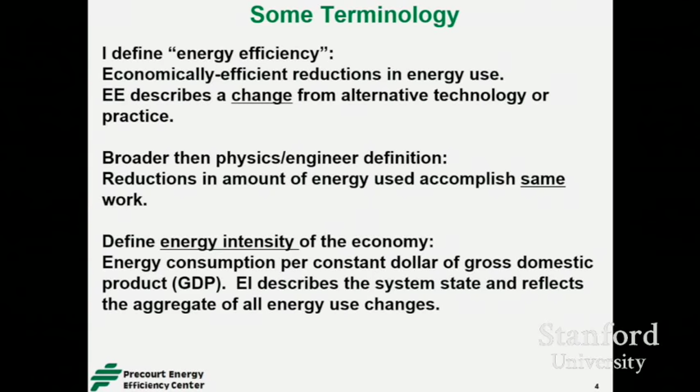And then I'll talk about the energy intensity of the economy—energy consumption per constant dollar of gross domestic product. Notice energy intensity is described as a system state. The accumulation of all the energy efficiency changes will change this aggregate statistic, the system state. So it's important to remember one is a change and the other is a state. I'm talking about this broader definition.

So why energy efficiency? Well, if you think of all the energy policy debates in the United States, there are about 3 systems: the economy, the environment, and national security. I call this the energy policy triangle. I think most of the debates have been about trade-offs among these issues.

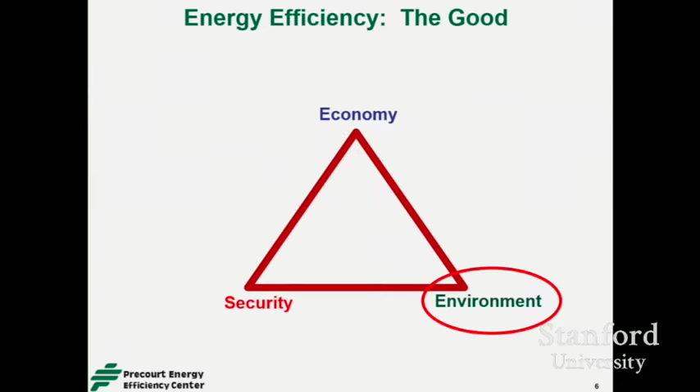So within that, what's good about energy efficiency? Well, for the environment, the cleanest energy is the energy you don't have to use in the first place—good for the environment. For security, if you use a lot less energy and reduce the amount of energy we have to import from insecure places, it's good for national security. And for the economy, if these are cost-effective—benefits exceed the cost—that it's good for the economy.

But what's the bad about energy efficiency? Well, the bad—something I used to talk a lot about, last seminar I gave here—was about this: it's all the things we're not doing. Options that have not been fully utilized, the unpicked fruit, the fruit rotting on the tree. And there really are some real behavioral, structural and market failures that have stopped us from getting the ideal amount of energy efficiency. A lot of my colleagues in the audience here are working on how to overcome those barriers.

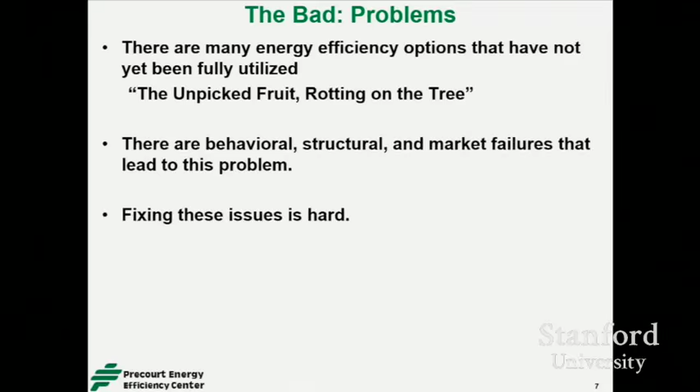Fixing those barriers is hard. Here's a whole bunch of market failures, institutional barriers, and behavioral issues that collectively there's been a tremendous amount of research showing that we could get more energy efficiency and it would still be economically attractive if we could get past those barriers.

But what I want to talk about is the reality that real energy efficiency is really all around us. We just have to look around and see what's happened. Some of them are new and improved technologies. Let me give an example.

The light bulb: compact fluorescent light uses 13 watts, replacing an incandescent that used 60 watts. So this uses about 22% as much electricity to give the light, but it's not ideal light. Now we have LEDs that take about 11 watts to get about the same amount of lighting, and this is just as good quality light as you can get from an incandescent.

Another new technology that's been perfected is motion sensing, light sensing switches. So you may at home tell your kids to turn off the lights. When you leave the office, you don't have to do that yourself because they'll turn themselves off for you.

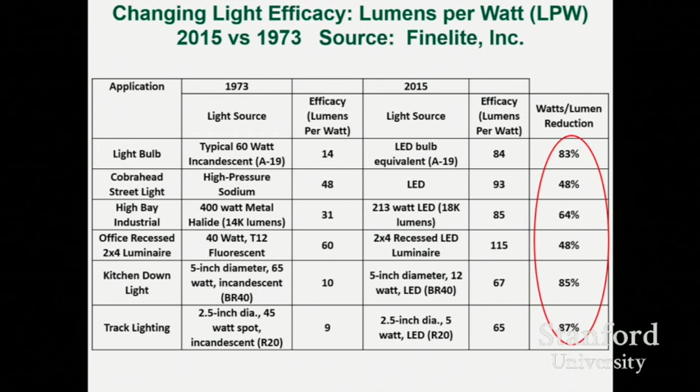Just new technology. So what's the bottom line of these? If you look at 1973, using that date because it was the oil crisis, the oil embargo, and compare light sources then to what we see now for light bulbs, street lights, industrial, offices, kitchen, track lighting—the reduction in watts per lumen for lighting ranges from 48% to 87% to get the same quality of lighting. So at the micro level, lighting, we use a lot less energy in order to create light.

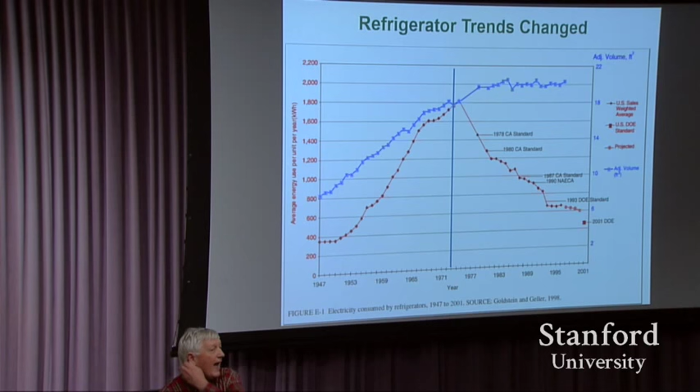Refrigerators. Many of you have seen the graph that starts in '73. I like the graph that starts in 1947 because this is the amount of electricity used per refrigerator of things sold in different years, going up to 1973. As the blue line shows refrigerators getting larger, the red line is the amount of electricity per year used in those refrigerators—it was going upward until the time of the energy crisis in '73. Then there were technological advances funded by the federal government at Oak Ridge National Laboratories and Lawrence Berkeley Labs that changed the compressor systems, changed the insulation systems, and now this is what's happening to energy per refrigerator, while the size is continuing to go up.

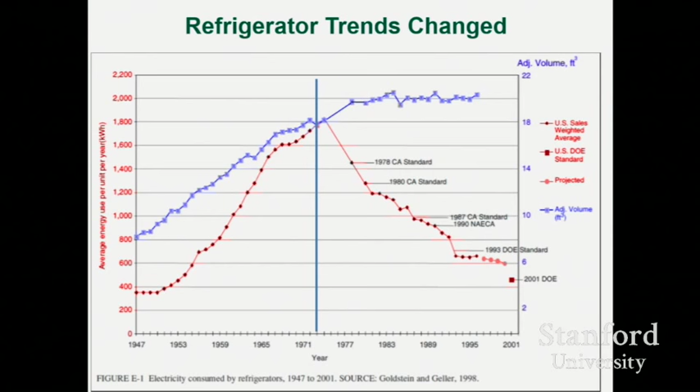So we're getting refrigeration using a lot less energy as a result of—this shows different standards coming in. But those standards came in because new technology was invented and integrated into refrigerators, and manufacturers then figured out how to use that technology for more efficient refrigerators, and then the standards kept pushing it faster and faster downward. So refrigeration. Now, cars and trucks.

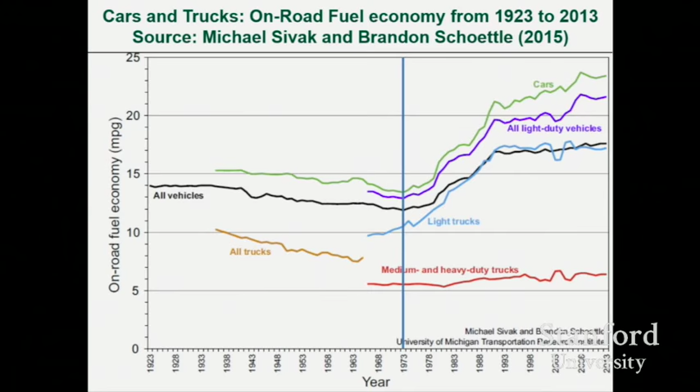Before 1973—this goes down to 1923—the miles per gallon average of all vehicles on the road was going down. Cars was going down, all trucks was going down. Light trucks, the most recent data, was sort of going up. Then we had the energy crisis. Gasoline prices went up. We passed the corporate average fuel economy standards, which I'll call the CAFE standards, and that downward trend turned sharply upward.

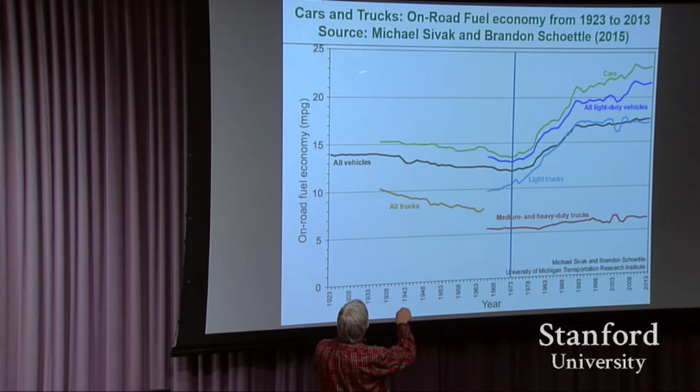So all cars now on the road as of 2013 got about 23 miles per gallon, as opposed to 12.5 miles per gallon in 1973. If you take the inverse of that, fuel use per 100 miles, in 1973 to drive 100 miles we used 8 gallons. Now for the new cars, we use 4 gallons to drive that same 100 miles. Energy efficiency—we're getting the same quality of service using less energy.

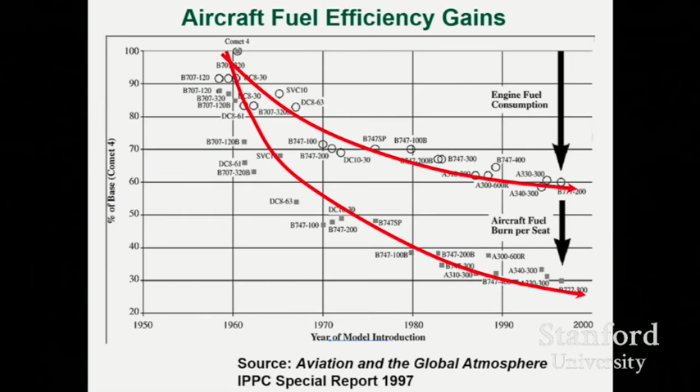Aircraft fuel efficiency—this is an index going back to 1960. If you look at engine fuel consumption, standardized thrust of the engine is down now to about 60% of what it was in 1960. Aircraft fuel burn per seat mile is about 28% of what it was. Those are basically technological changes.

For example, winglets—that increases the efficiency when it's cruising. The Dreamliner has modified the equivalent of winglets with that turned-up tip. This is composites, a composite body. It's designed to use 20% less fuel than the more recent planes it's replacing.

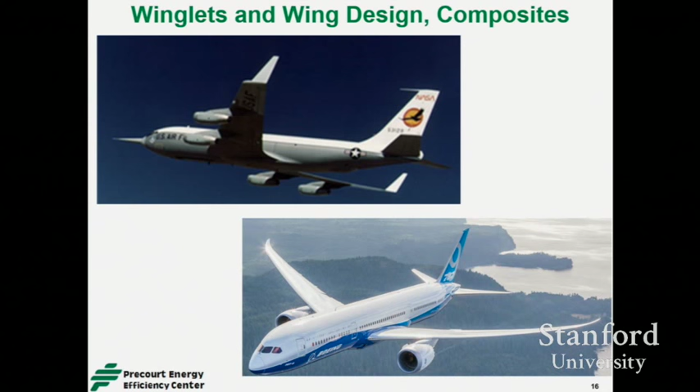So again, why is it that they're doing this? According to my son-in-law, who is high up in Boeing, it's because the airlines have been pushing them to have the next generation of planes even more fuel efficient. Something like a third or more of the cost of running an airline is jet fuel.

And with that, there's a big, strong market force for the airlines to push Boeing and Airbus to have more fuel-efficient airplanes.

So those are new technologies, improved technologies. Now that we had changed insulation, that's implementation of existing technologies. We didn't have to create anything new.

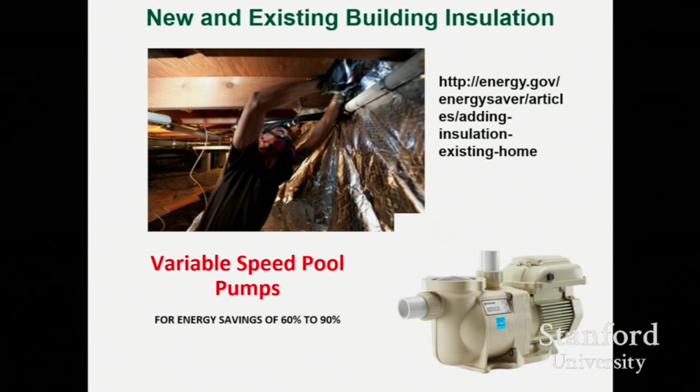New building insulation, both new buildings and retrofit of existing buildings, but even pool pumps. You can reduce your energy use by 60 to 90% with variable speed pool pumps.

You must be saying, boy, what a bunch of trivial things. They're all insignificant. And if you're saying that, you got the point. Because what energy efficiency has been is accumulation of a lot of things, each in themselves, which looks insignificant.

I'm going to give you some aggregate statistics that show how a lot of insignificant little things add up to a massive thing. So other building technologies: insulation around your water heater, weather stripping, programmable thermostats.

What I thought was cute was that early programmable thermostats, you know, you can have it go down at night and stay up when you're warmer in the day, when if you're heating or cooling, it's hot in the middle of the day when nobody's around.

Well, only something like 20% of them were programmed. 80% of them might as well have been a dumb thermostat.

And so anybody who remembers the VCRs that always flash 12:12:12, same concept.

So what's the simple solution? Well, they're sold pre-programmed now. You buy a thermostat, it's an Energy Star pattern that's pre-programmed.

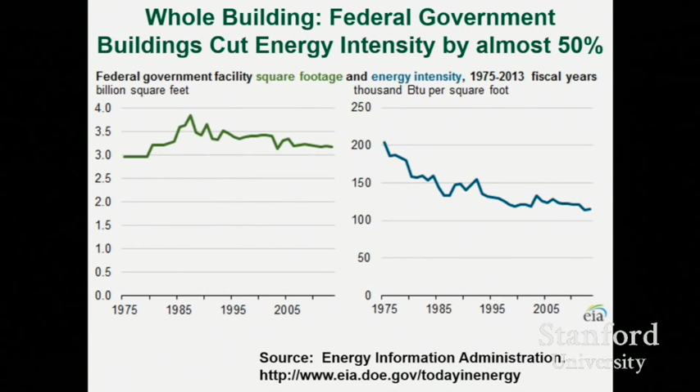In '75, it was 200,000 BTUs per square foot. Now it's 120,000, down 40%. That's whole buildings operated by the federal government.

The Stanford heating cooling system - it's not an energy system, it doesn't supply any energy. It's just an energy efficient conversion system that moved us from the steam system to the hot water system.

It uses hot water and cold water that is heated or cooled by electricity, which we buy from off campus. But this can reduce the carbon emissions and energy use by the whole system.

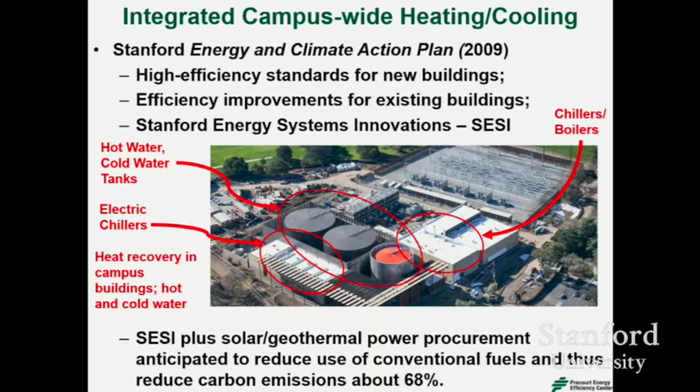Let me jump in. We have changed practices. This is a long quote, but this is from DuPont Titanium Technologies, one of the DuPont companies. The headline is that they saved $100 million from energy efficiency. That's really what their headline was.

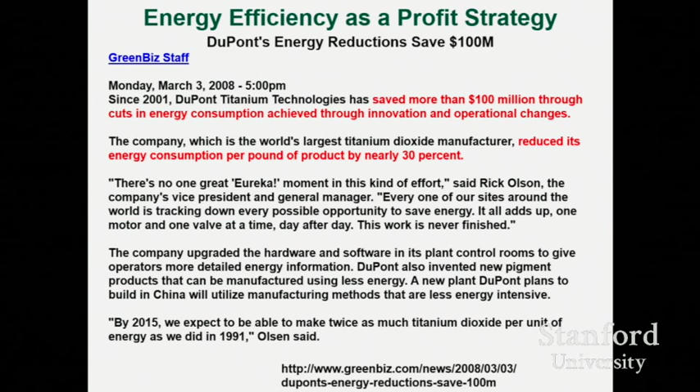They saved a lot of money. I love what their general manager said: no great eureka moment. They're tracking down every possible opportunity - it adds up one motor, one valve at a time, day after day.

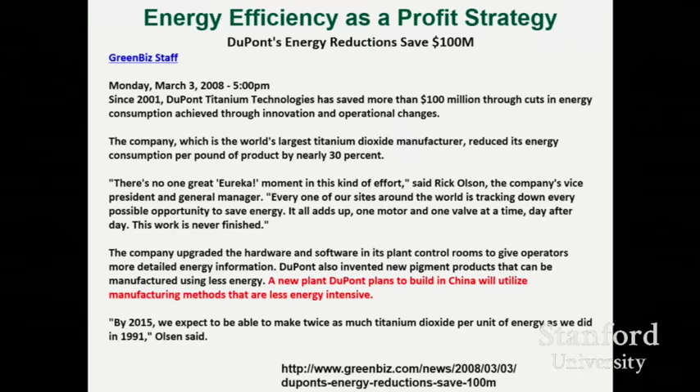Hardware and software and control rooms give operators more detailed energy information. New pigment products, new plants that are more energy efficient. Lots of little things cumulatively saved them $100 million.

Motivation for energy efficiency - this is within Microsoft. This is a dashboard that they use to track the building performance index of every one of their facilities internally.

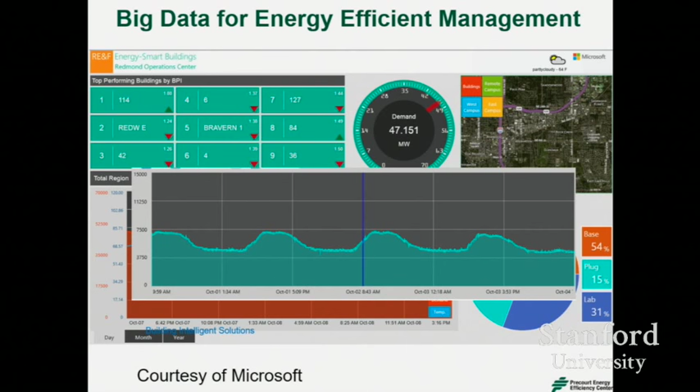You can track it on different time scales and find out where you have energy use problems by benchmarking one facility after another. So Microsoft and many other companies use big data to find ways of saving money through energy efficiency.

Airlines - I told you about the technology. Well, the technology has led to reductions in BTUs per seat mile, for both international and domestic, and this is the change in BTUs per seat mile since 1960.

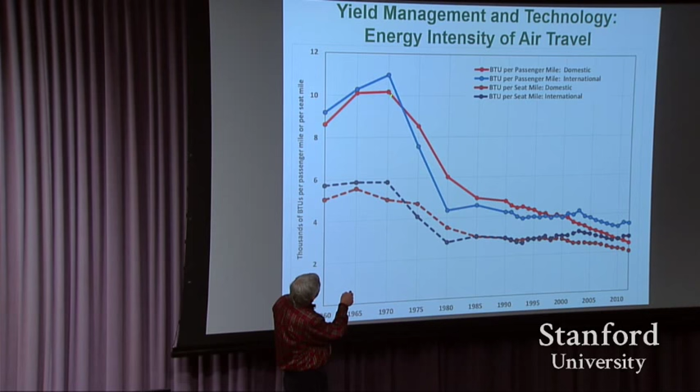And if you just compare with 1970 before the crisis, the BTUs per seat mile is cut in half, but the BTUs per passenger mile is down much more sharply. And why is that? Because the load factor has gone up much more.

Airlines have learned to use software, incentives, and yield management to crowd us into planes - not smaller seats, because that influences BTU per seat mile, but the difference between that and passenger miles.

That difference is a profit motive, a private sector profit motive that the airlines have led to. If you look at thousands of BTUs per passenger mile, this is 10 or 11, and that's 2.5 or 3.5.

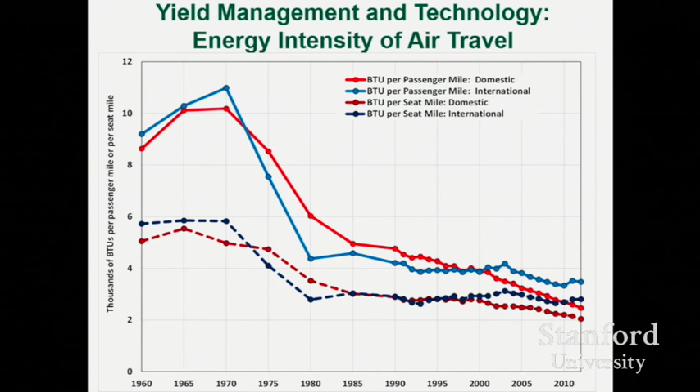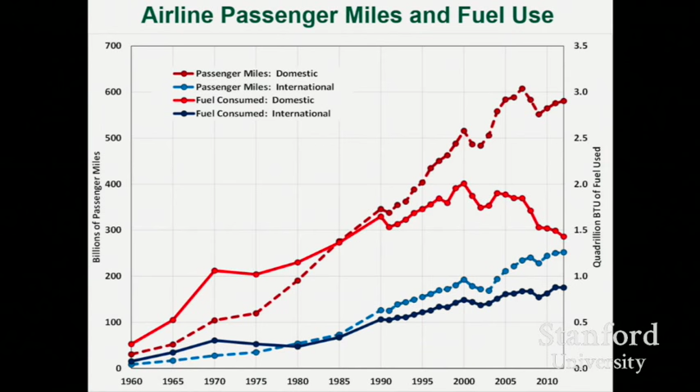Tremendous energy efficiency in air travel. So that's why our domestic air travel can continue to grow while the actual amount of fuel that we use is declining in the aircraft industry.

Another practice is that some commercial buildings are being retrofit. This is the Empire State Building, and this is their internal analysis of all the actions they took to reduce energy use. Notice these small percentages - 2%, 3%, 5%, 9% - from all the various things they did, leading to a 38% reduction in electricity use from the retrofit.

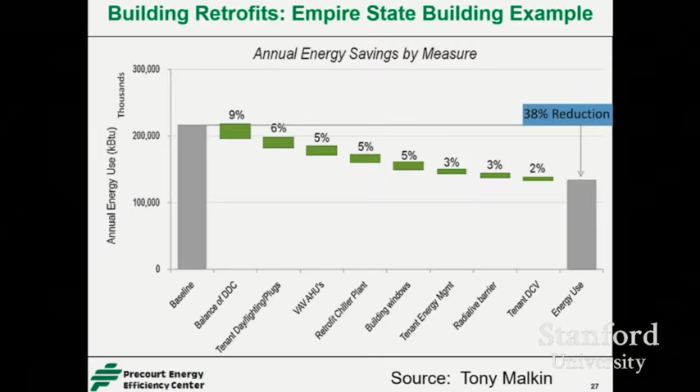Did they do that because of regulations? Well, actually they got some energy efficiency rebates from the utility, but they share their spreadsheets. This was profitable for them without any rebates. They took the rebates, of course, because it was gravy, but it resulted in a 38% reduction basically in the commercial building.

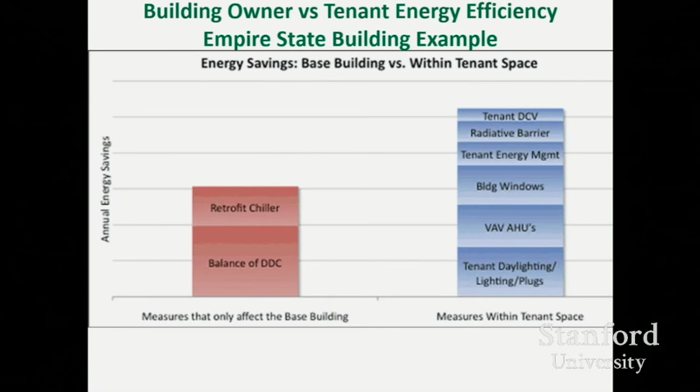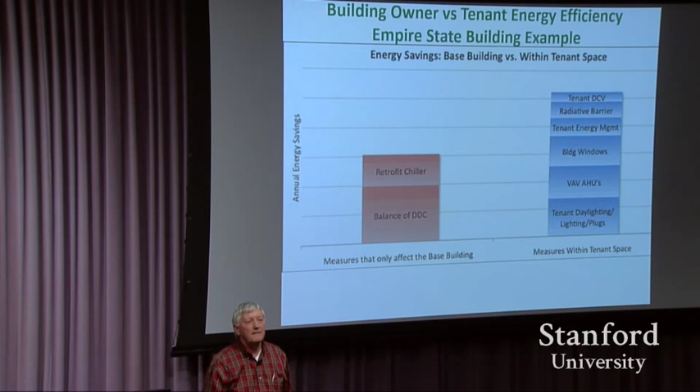What's interesting is if you look at how much of that is in the tenant space versus the building. These are the actions that influence the base building, and these are the things in the tenant space - their own tenant energy management, windows, the daylighting. So in the retrofit practice, more is happening in the tenant space than in the base building.

So what they've done is create brand new contract forms between the Empire State Building, the real estate trust, and the tenants in order to deal with the split incentive problems that you have in buildings. So they have performance contracts, which have been used to manage this within tenant space.

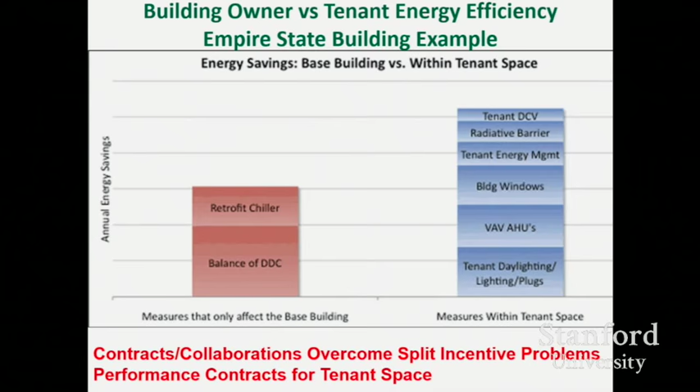This is what Tony Malkin, or the real estate trust, invested in. This is what they co-invested in with the building tenants. Energy efficiency then was not just about the technologies, but legal structures were changing, and contractual structures to motivate changes.

You can't read most of these, but this is internal carbon prices - the list of North American companies who've imposed internal carbon prices in their operations to motivate their managers to do things to reduce carbon dioxide emissions. But most of those emissions were from energy use, so it therefore motivated reductions in energy use.

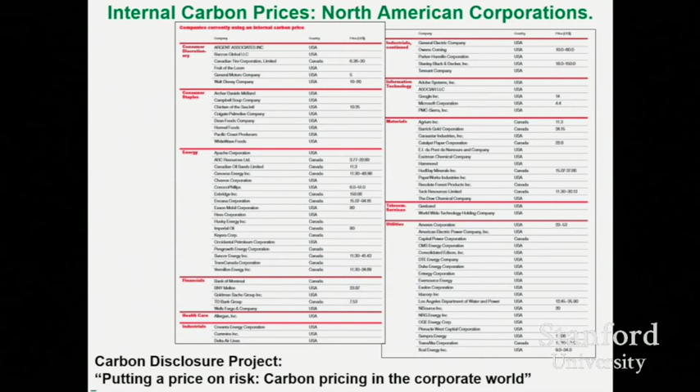So those are examples. Many more examples, but we only have so much time in the seminar. Let's look at the aggregates.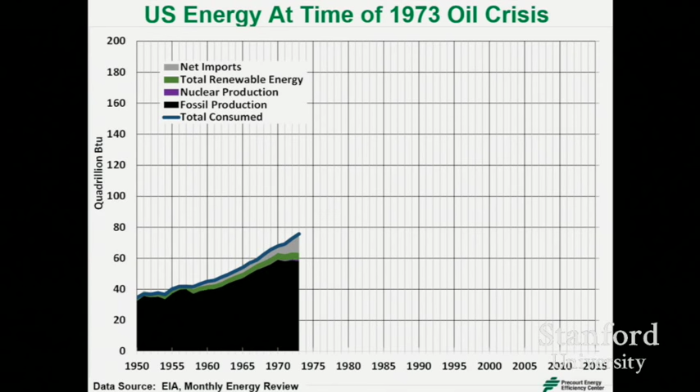Notice that imports by 1973, at the time of the embargo, had just tripled from the year before. We were looking at it just going up and up and up, and now we've seen an oil embargo where the Arab OPEC countries embargoed the United States, Netherlands, UK, and a few others from oil. Oil prices tripled at that time. It was a shot across the bow, and that changed everything.

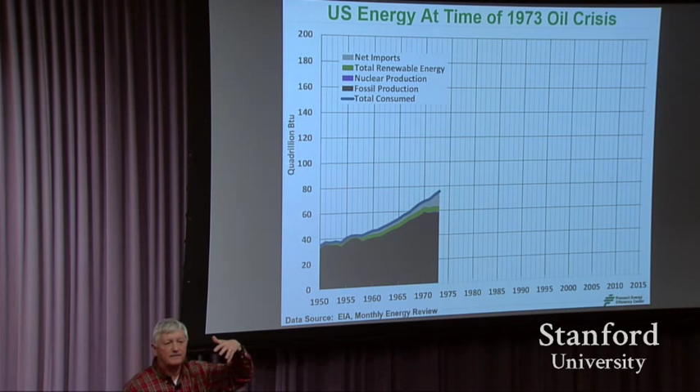But notice this blue energy use - it was growing right along in lockstep with the economy, minus about 0.5% a year. That means the ratio of energy per GDP was declining about 0.5% a year. And so energy use was going up with the economy.

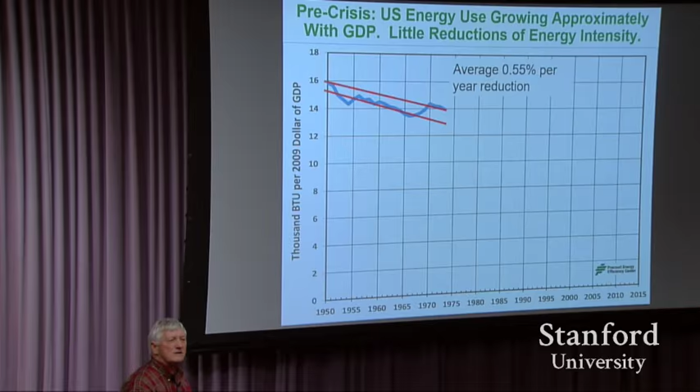So if you look at energy per unit of GDP, I could draw lines from the beginning to the end, following most of this from 1950 through 1973. It averages about, call it 0.5% a year reduction in energy per unit of the economy. That means energy use was growing that much less rapidly than the economy.

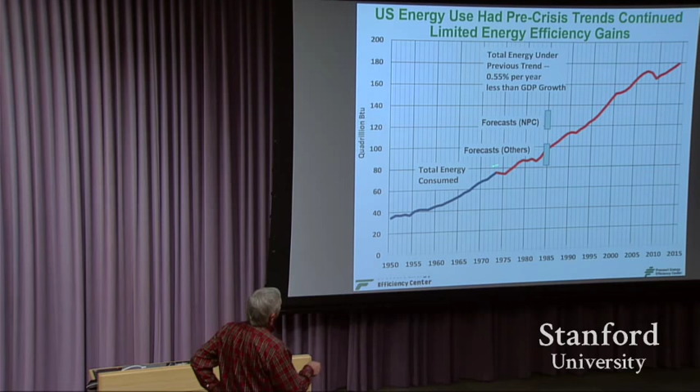So what would have happened if we followed that same trend? This is the actual growth of the economy, minus 0.5% a year. This was what I'm calling the benchmark of what we would have had with only limited energy efficiency, no more than we had before this shot across the bow - that's 180 quads of energy that it would have grown up to. The forecasts at that time were around here and there, so this was consistent with what everybody was forecasting who was doing the analysis.

We created government agencies. The Federal Energy Administration was created, and the Project Independence Report—remember President Nixon's Project Independence—completed by President Ford. It said, look, there are several things you can do: accelerate supply with more domestic production, what they call the conservation strategy, what we'd now call an energy efficiency strategy, and emergency planning. I like this—they said any program would surely be a mixed strategy, taking elements from all of the above. That first came from the Ford administration.

But it wasn't just what the government did. The private sector now faced high energy prices. They also faced the reality that energy was an issue, so they started thinking about it—it was at the front of their minds now. So it became an important factor of innovation. You saw things like DuPont's titanium technologies. The patterns of innovation changed; energy efficiency became an important criteria, like innovating for winglets in airplanes. Capital investment changed because there was a profit payoff for reducing energy use. Even management changed—you'd hire energy efficiency coordinators charged with finding ways of reducing the use of energy.

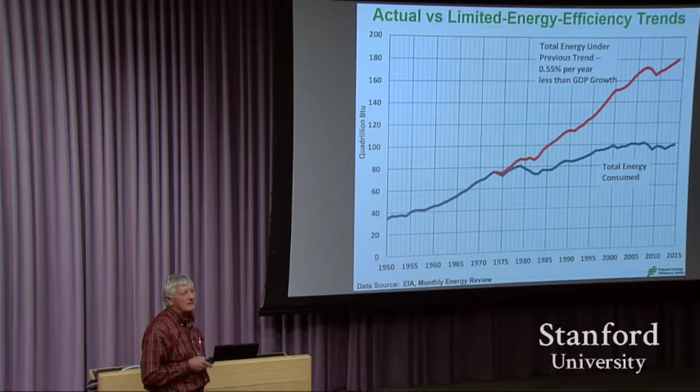So here's what the actual energy use has been in the United States, and you can compare it to what it would have been without energy efficiency. That difference is about 80 quadrillion BTUs, 80 quads, from 180 to a current 100. That is all of those little things I was telling you about, all of which on themselves didn't look very important, but cumulatively just kept growing bit by bit. Some of you are parents, and you know having children—they don't seem to grow from week to week or month to month, and all of a sudden they're asking you for college tuition, and you say, boy, they've grown. That's essentially what's been happening—it's been a slow, cumulative process.

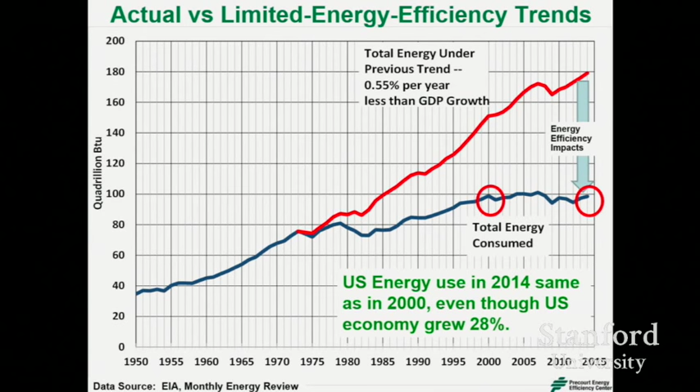Notice that since 2000, we haven't increased the use of energy, even though the economy grew 28%. So it's not that we've decoupled energy from the economy, because when the economy goes down, energy use goes down too. It's that the rate of energy efficiency improvement is now roughly equal to the rate of economic growth in the US economy, so our energy use isn't growing.

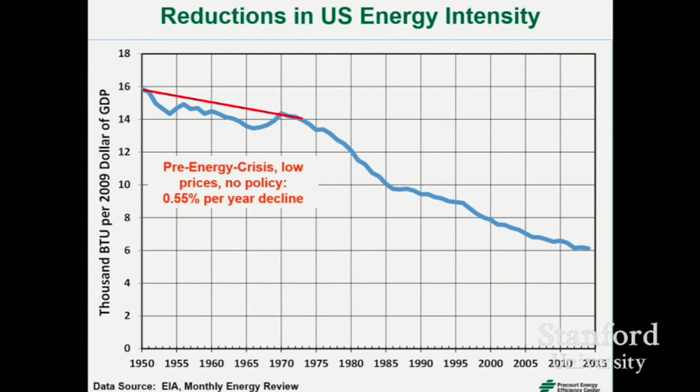So if you look at it in terms of energy per unit of GDP—that was before the crisis, we had 0.5% per year. Once we started getting energy policy, it went down to 2.7% a year, until oil prices dropped in 1985, then it dropped to 1.7% a year. What changed between these? Here you had a lot of policy initiatives, a lot of public policy attention to energy, and very high prices, all working together to cause cumulative energy efficiency in the economy. Here, those issues—there was still a higher price than we'd had in the past, still a lot of energy attention but a lot less than during the other time, and still public policy but less. The rate of change was less.

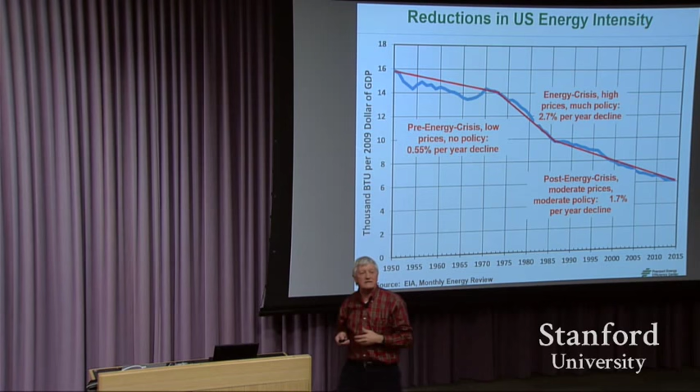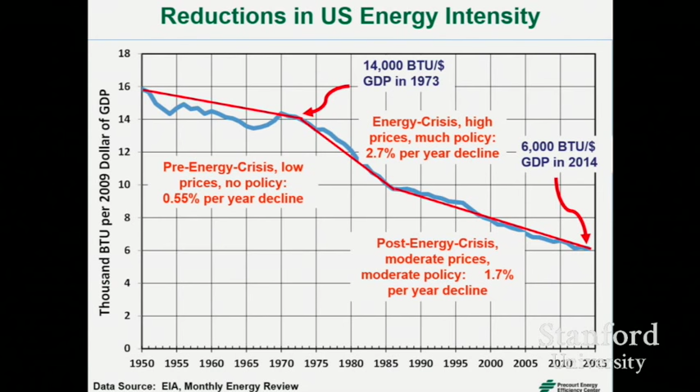Now, some of you may say 2.7%, 1.7%—those are pretty small numbers. Yeah, they are, a couple percent a year. But energy use in 1973 was 14,000 BTUs per dollar. By 2014, it was 6,000 BTUs per dollar of GDP, adjusted for inflation. So the effect of these cumulative, small, tiny things all added together made the energy intensity of our economy cut down very, very sharply during that time.

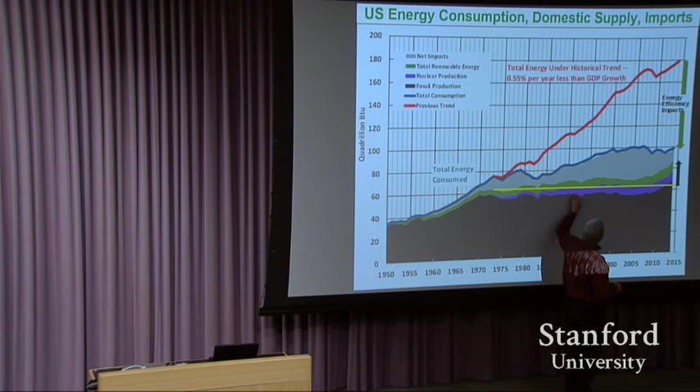So you can say, okay, the federal government asked for more supply of energy and energy efficiency—let's put that together. Here's the total supply of energy that we have. This is fossil fuels, the purple is nuclear, this is renewables—and even up here, those renewables are still over half hydropower and burning wood. This uptick right here is basically fracking for oil and gas. You see this increase in nuclear from nothing to up there. So this is the contribution of energy supply to bring the imports, shown in gray, down to controllable manners—that's about 24 quadrillion BTUs. The contribution of energy efficiency towards closing that gap is about 80 quads.

This is back to what I said: what's happened on the demand side of the market, cumulatively throughout the whole economy, has been much more important quantitatively than what's happened on the supply side for energy security, for reducing that gap.

One thing is most of them are pretty invisible. You walk past a house and there's solar cells on the house and you notice it. You come back and tell whoever you want to talk to, hey, the Joneses have solar. If you walk back to that house, they also have light-emitting diode lights. They have an Energy Star television, which is turned off when it's not used. They have a well-insulated home.

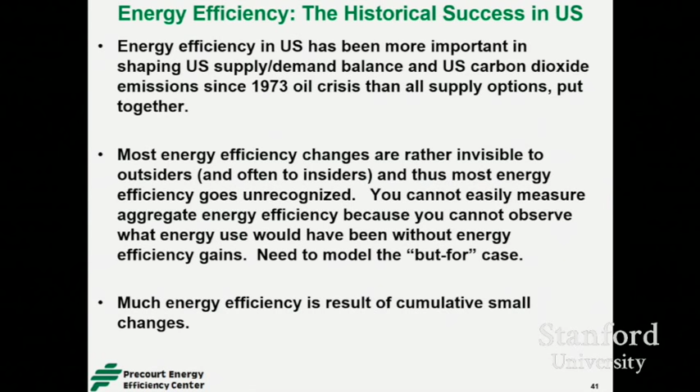They have an Energy Star pattern on their thermostat. You would never notice that, and you'd never tell anybody that, because that's the boring stuff of energy efficiency. But that could have been just as significant for energy as those solar panels on the roof. So mostly invisible.

Furthermore, if you're measuring how much solar energy would generate, you know what number to use because you start from zero. No doubt about it. Here's how much. For energy efficiency, you don't know where to start from because it's what you didn't do. That's why I started with a benchmark of what was the pattern per unit of the economy that we would have before all of this action to start changing the patterns. Cumulative small changes.

So what's the consequences for the environment and security? Well, if you look at carbon dioxide emissions, we all know COP21 is going on in Paris right now. We could ask about the carbon intensity of the economy, carbon dioxide emissions per unit of GDP. You can decompose it as two multiplicative factors: carbon dioxide per quad of energy, and energy use per unit of GDP. This is the energy intensity I've been talking about. This is the carbon intensity of energy consumption. This is really the demand side of the market. That's the supply side of the market.

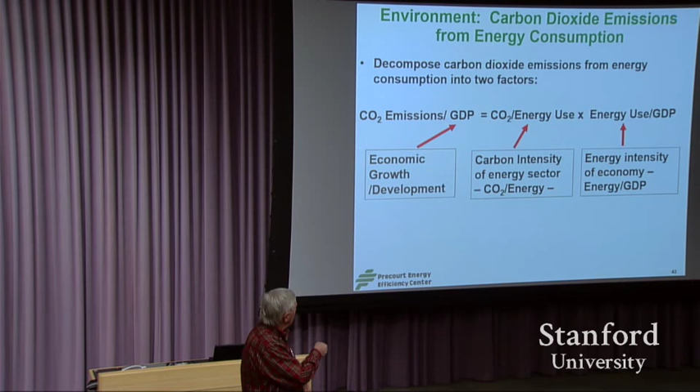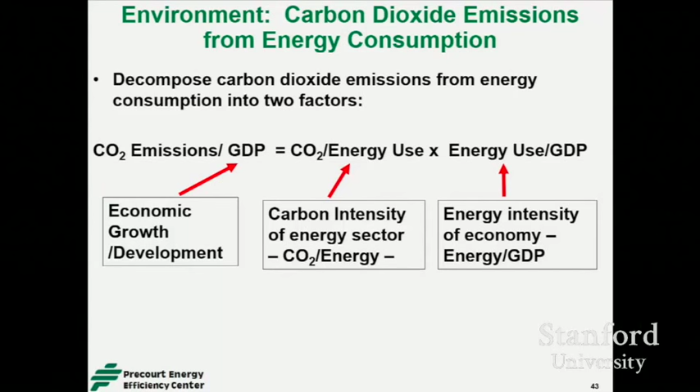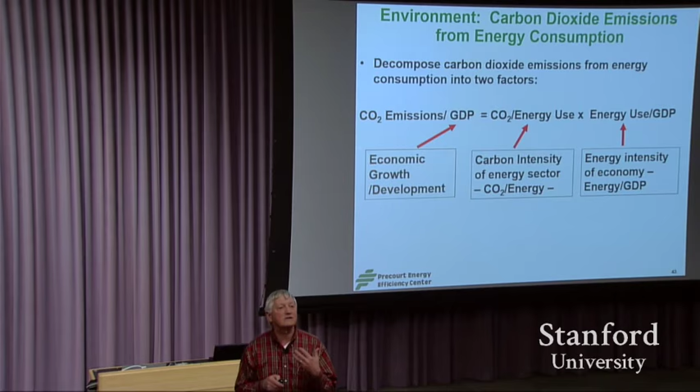When we have zero or low carbon sources of energy, that reduces the carbon intensity. That is wind, solar, hydro, nuclear power. Maybe biomass, depending upon which kind of biomass we're using. All of that would decarbonize the energy sector. So one could then decompose the decarbonization of the U.S. economy historically into these two multiplicative factors. That's what I'm going to do next.

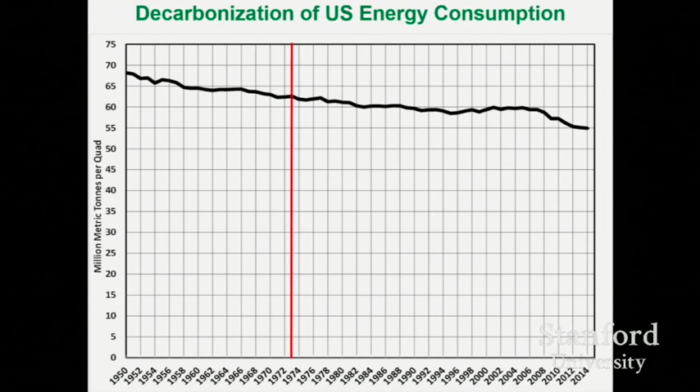If you quantify the effect from this to that, the biggest single effect is we have more nuclear power. And the second biggest is more natural gas. And a factor, an order of magnitude smaller than that, is wind plus solar plus geothermal. Okay? So let's look at that decarbonization, and let's ask how these together led to the decarbonization of the US economy. It hasn't been decarbonized nearly enough, but what has happened so far?

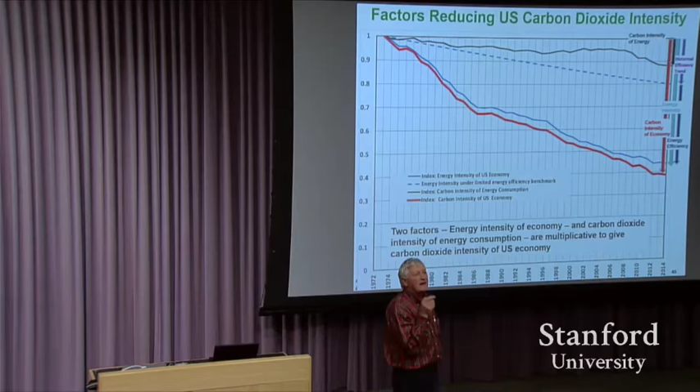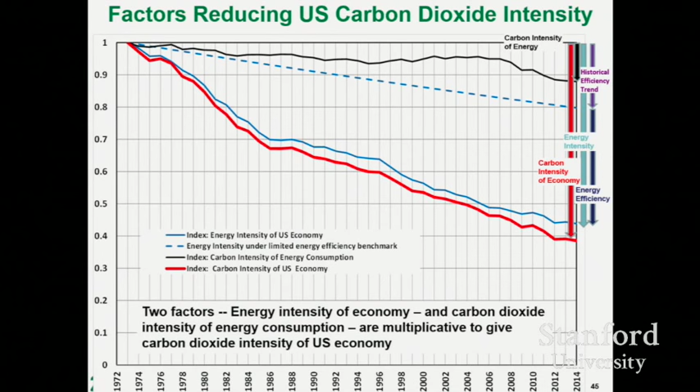So the energy system is 89% as carbon intense as it was in '73. The energy intensity of the economy is 45% as much. So you multiply 45% times 89%, and you get down here to the 39%. So as I said at the beginning, the reason that we're cleaning up the carbon dioxide in the economy is a little bit because of nuclear, much less because of solar and wind, but mostly because of energy intensity of the economy and energy efficiency.

I mentioned imports. If nothing had happened, no energy efficiency improvement since the shot across the bow in 1973, this gray plus this gray would have been the energy imports.

Even if we increase this amount of the supply, that would have been something like 100 quads of energy import. So big it couldn't have happened. The U.S. could not have politically survived in a situation that vulnerable. The world markets for energy would not have been able to provide that amount. So what would have happened is energy prices, imported oil, would it be $40 a barrel now? I don't know how much they would be, 200, 300, 400, way up there.

But we would internally have been forced to a debate of what we were going to do. We would have gone to energy efficiency and new supplies. We would reinvent Project Independence, so we couldn't have gotten to this. This would have been a non-viable situation. But what kept us out of that non-viable situation is mostly energy efficiency and a little bit of additional supply.

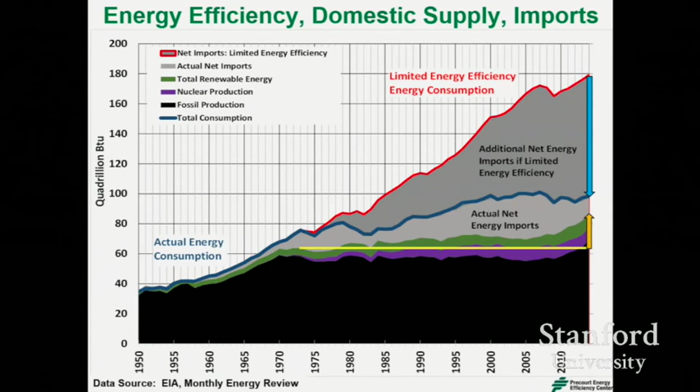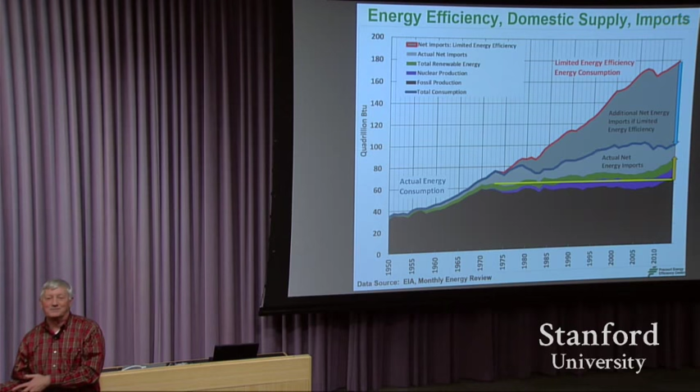So all of you who've seen the television advertisements from the American Petroleum Institute that said, we've seen the new energy power in the world, and it is the United States. And it says because of the fracking for oil and gas, we now are secure. Well, that's true. That's the amount at which we're more secure because of the oil and gas fracking. That's the amount we're more secure because of the nuclear. And that's the amount we're more secure because of energy efficiency. So I agree with the advertisements, just not the causation that's implied in those advertisements.

So I notice I've run out of time. If you want to follow up on these things, those are in the book. The draft PDF of the book, which has a lot more of the details than this, is posted on the website. I asked that this be posted not just for the students, but for anybody who wants to use it. It's on there right now. Afterwards, it'll go to the archives. The title of the book is pathetic still. It's boring. It is about as boring as watching people's lights get more efficient. So good ideas are welcome for a catchy title, but I expect it to come out this summer, and so here's where you get more information.

A great presentation, first of all. I would be interested in checking out the global numbers in terms of energy efficiency as well, especially because I think the economy of the United States has shifted away from energy-intensive processes because manufacturing has moved on to China and such. So I assume part of that drop in the curve would also be accounted for by things like that. Let me stop the question there because you've posed two different questions, for both of which I have some answers. So let's look at sectoral, okay?

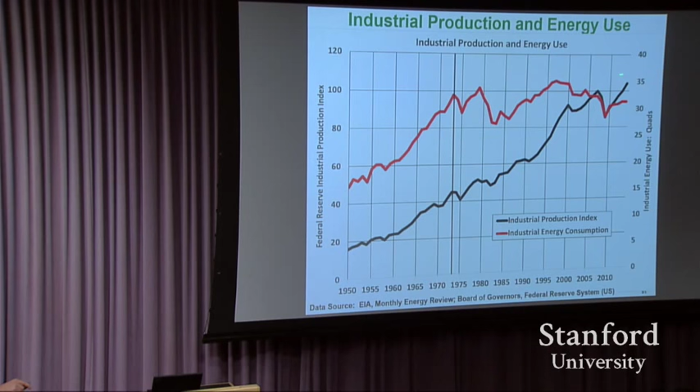This is the industrial sector. This was the past trend, 73, it flattened out. That's what you're saying. It's a lot of substitution. Notice that same inflection was in the transportation, residential, and commercial sectors. So this change happens everywhere, not just in the industrial sector. So in the industrial sector, you could ask what happened. Well, one, is it that the industry collapsed? No, this is the index of industrial production. It just kept growing up until a little after the year 2000, then flattened out, part of the recession and China competition.

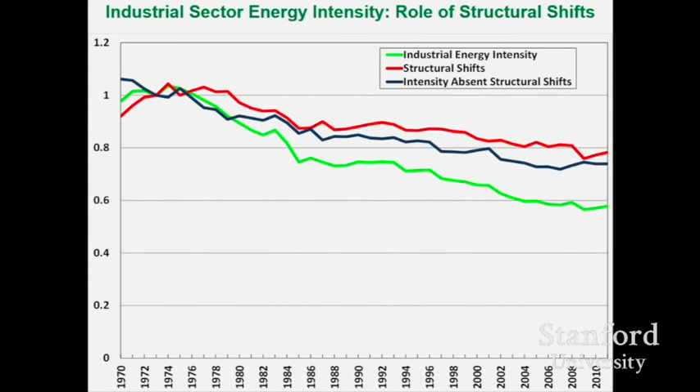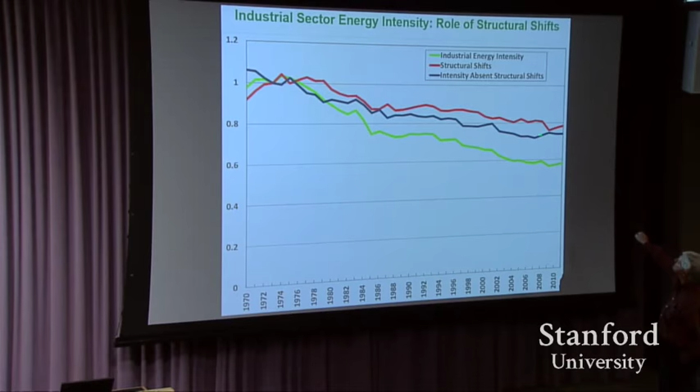But it's not that industrial production stopped. You can ask, well, how much of this is substitution, changing what the U.S. produced, versus more efficient production of the same sorts of things? And this is an EIA, Energy Information Administration, EERE analysis of the effects of the structural shifts and the intensity shifts without the structural shifts, adding together to this change in industrial energy intensity.

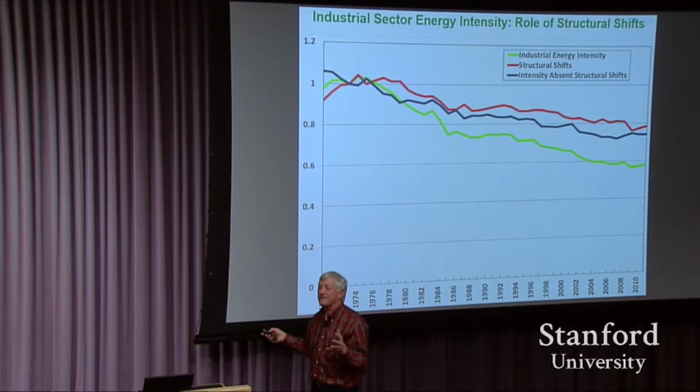They said this change in the industrial sector is about half and half. About half structural shifts and half energy efficiency within those. Now, my definition of reducing energy in an economically attractive way still includes this shift. So I count this all as energy efficiency, but that cuts it in half.

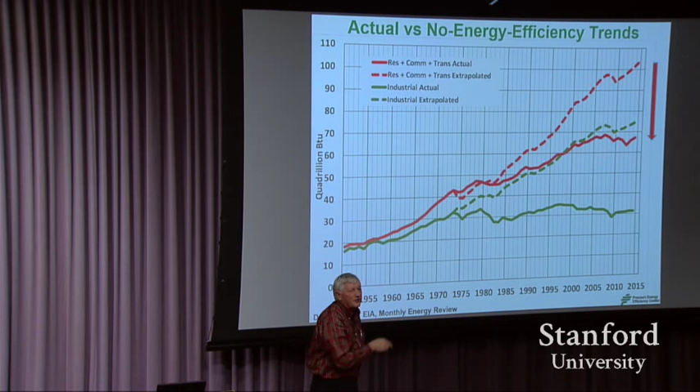That's half and half in the industrial sector. So if you take the industrial sector, what it would have been without these changes versus what it actually was, and you do the same for all of the other sectors, you'll see that you have about 35 quads reduction in all of the other sectors that had nothing to do with international competition. About 45 quads in industrial energy efficiency with those structural shifts. About half of them was the structural shifts, half wasn't.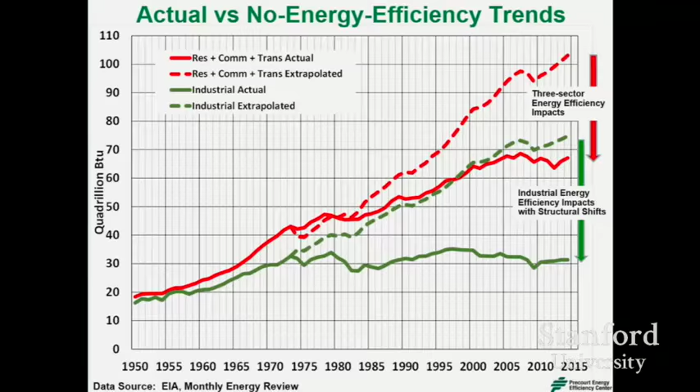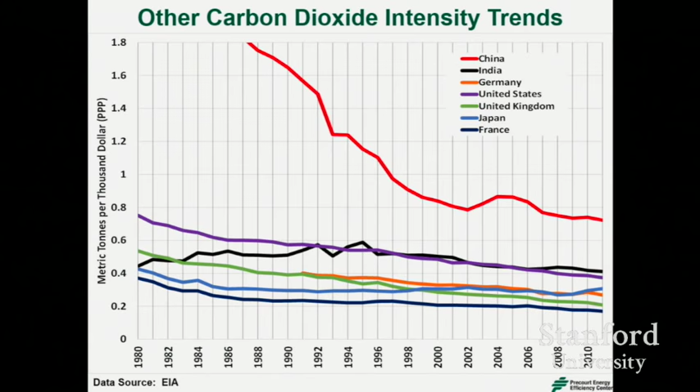So you still have, even if you want to think about that, mostly energy efficiency. And then let me just go quickly to a couple other graphs here, where we look at carbon dioxide trends of a bunch of other countries. They've been going down. China is way up, and it's been going down on others. The purple is the United States. So we see the carbon dioxide trends going down.

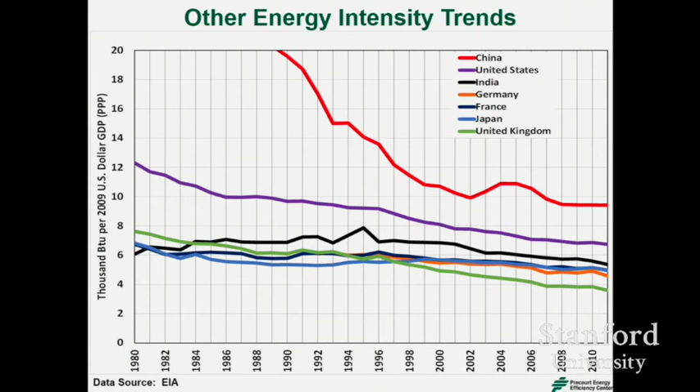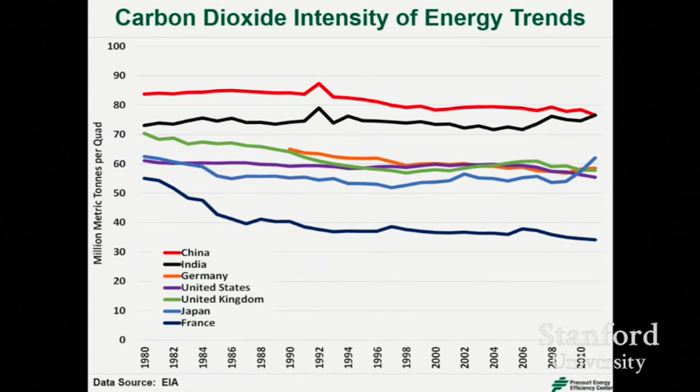A great question on history. I think I'd like to actually preempt all additional questions because we're running out of time and ask one more. And that is, Jim, based on what you've learned and what you've presented, could you play it forward for us? If you were in Paris right now and not in Palo Alto, what advice would you give the delegates? Not in terms of specific policies, but where to focus their attentions.

I would say that the all of the above strategy is still appropriate, but most of the bang for buck that they're going to be able to get is in the way they manage their economy for energy efficiency, the way they promote the innovation in their economy, the way they influence the fuel efficiency of their vehicles. Yes, they should be investing in the new renewables.

But the reality is if they really focus on their economy and how it uses energy, they can keep the consumption of energy in check while the new supplies of energy catch up and be able to move forward. And so that commitment to the demand side is really something that I think is really important for them to do.